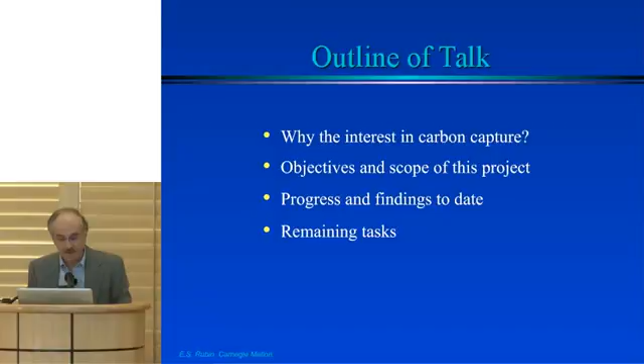So very briefly, it looks like all of us are starting talks with why the interest in carbon capture. I'll assume some of you have come here without too much background in this. I'll talk a little about the objectives and scope of our GCEP project, some progress to date, and some of the work ahead.

So why the interest in carbon capture? In addition to Ed's comments and others, the fundamental motivation is climate change and the fact that we need not small reductions but large reductions in CO2 emissions to achieve those goals. If we were talking about 5 or 10% reductions to solve the climate problem, we would probably not be talking about CCS. 70, 50, 80% is a different story.

Fundamentally, CCS is the only technology available that we know of that can address carbon emissions from the existing use of fossil fuels, which are likely to be around for some time. So my view of it is more of a bridging technology, something that will be necessary if we want to get large carbon reductions fairly quickly while we're working on a long-term sustainable future.

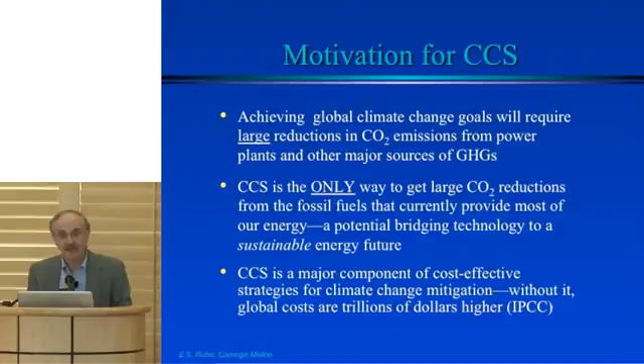CCS also turns out to be a major component in all the modeling studies done globally. When one looks at cost-effective strategies to meet climate change, every modeling group who's looked at this shows that without CCS on the table, the costs of achieving climate goals will be substantially higher. Trillions of dollars are typically the estimates that come out of that.

So while the focus of this talk is on CO2 capture, we shouldn't forget that it's really part of a capture and storage, or sequestration, system that has three major components. First, the ability to capture CO2 from power plants and other industrial sources that produce it. Again, the CO2 might arise from coal combustion, but it might also arise from natural gas combustion or the use of biomass, so-called negative emissions.

In order to sequester or store it in a geologic formation, which looks like the most likely option right now, one has to compress and transport it. The compression is typically needed to turn it into a supercritical fluid, essentially a liquid that can be moved by pipeline to appropriate storage sites.

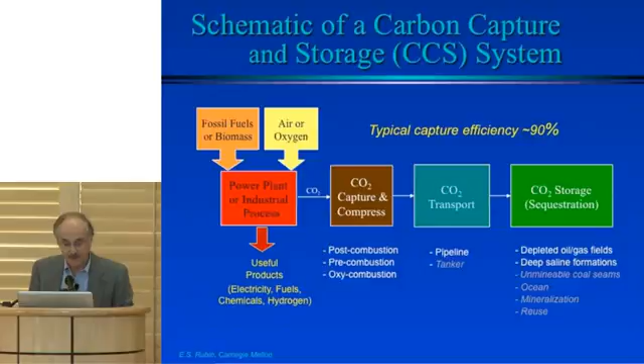We're going to be talking about two major approaches: what we can do today, as Ed set up beautifully, post-combustion and pre-combustion. Here's a little more detailed schematic of what a post-combustion system would look like at a coal-fired power plant today.

This is what most utilities look like without the CO2 capture piece. The yellow box in the middle represents a variety of technologies to address so-called criteria or conventional air pollutants: SOx, NOx, particulates, mercury. If one were to capture CO2 in a post-combustion environment, one would add another piece of technology after that, upstream of the stack.

As Ed indicated, the current technology that would do that job is an amine-based system. We have CO2 at low concentrations and low pressure, so this is a chemical solvent, and its energy requirements are substantial.

The pre-combustion system looks a little more complex. The CO2 capture piece here actually has two components. There's a CO2 capture unit toward the back which today would use a physical solvent, since here we have high pressures and relatively high concentrations of CO2.

So rather than a chemical solvent, one can use a physical solvent to do that job at a much lower energy cost. But for that to work, one first needs to add upstream a water gas shift reactor, a chemical process that converts CO in the gas to CO2 and H2. So the CO2 capture unit is basically working on a CO2-hydrogen mixture, as opposed to post-combustion, which is largely a CO2-nitrogen mixture at much lower pressures.

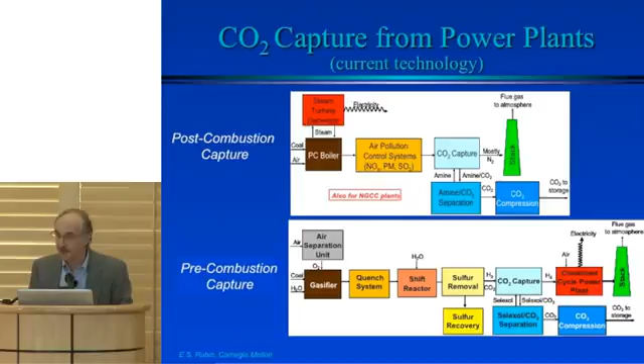Again, the chemical that would be used today favorably is commercially called Selexol. It's a glycol-like substance that has been used widely in industrial applications.

Here's what some of this actually looks like in terms of hardware. These technologies for both post-combustion and pre-combustion have been used at power plants, both gas and coal-fired, the two on the left, at scales roughly an order of magnitude smaller than a commercial plant today. These units are on the order of a couple of tens of megawatts electricity equivalent.

Hydrogen production plants, or this particular one, use a Selexol system to essentially do the same separation, except the hydrogen is used to make chemicals instead of electricity.

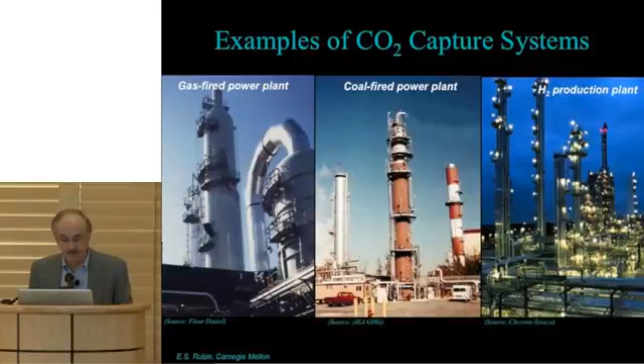Here are photos of two newer developments. The one on top, it would be fair to say, is a big deal. This is the first large-scale demonstration of post-combustion capture at a coal-fired power plant. It's what the community has been waiting at least a decade for.

Canada won the lottery on this one. The Sask Power Boundary Dam facility at 110 megawatts had its official inauguration just two weeks ago, though the plant started up a month ago. The CO2 capture unit is this unit in the foreground.

This is now operating at 90% capture, and for the first month or so, so far so good. The picture on the bottom is a unit still under construction, now scheduled to start next year rather than this year. It's a large gasification plant that the Southern Company is building, capturing CO2 using Selexol as a solvent at a scale of 600 megawatts with about 65% capture.

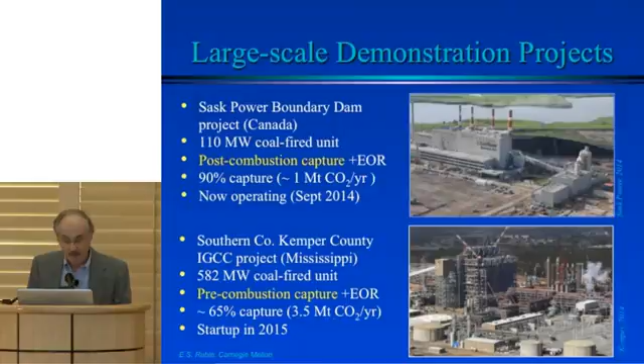So we're starting to see in these two examples, and others planned in Europe, the first large-scale implementations of that. If that's the good news, this is the bad news.

They're expensive technologies. To one significant digit, in a new post-combustion plant, adding an amine system would increase the cost of generating electricity at that plant by roughly 70%. The incremental costs are lower for gasification combined cycle and natural gas plants, but still quite significant. And in terms of absolute cost of electricity, we're at different baselines.

We're talking about CO2 capture in this meeting because most of that cost is associated with the capture part of the system. Transport and storage costs can vary depending on site specifics, but they're roughly on the order of 20%. So if you want to make a big dent in CCS costs, you've got to go after the capture process.

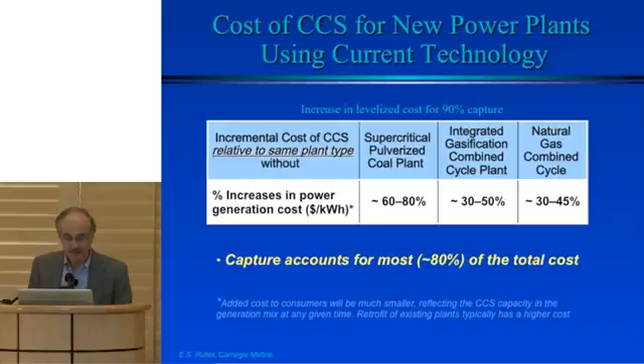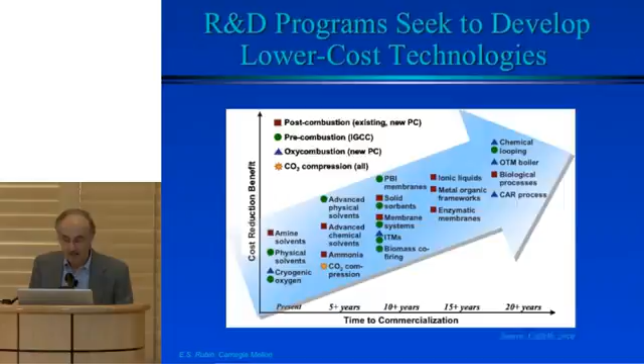I was happy and delighted to see GCEP join that process a couple of years ago. A request for proposals sought advanced carbon capture processes, and consistent with the GCEP philosophy, looking for—these were the words—step out, game-changing improvements that could have big impacts in the next several decades. As a result of that solicitation, three projects were selected: Joan's project at Notre Dame involving ionic liquids, Randy's project at Northwestern involving metal organic frameworks, and Jen Wilcox's project here at Stanford involving some novel activated carbon sorbents.

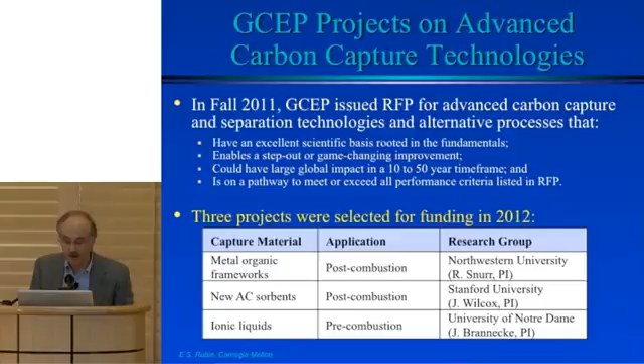So what am I doing up here? A year later, there was another RFP asking for development of a systems analysis framework to evaluate novel processes—these three in particular, but others in general—in the context of some rather rigorous criteria that GCEP had put in the original proposal for what they'd like to see in these advanced processes.

So we were selected, along with Chris Edwards' group here at Stanford, to work on a systems analysis framework that could be used to get some quantitative metrics for just how these advanced systems would fare relative to baseline systems in the context of full power systems.

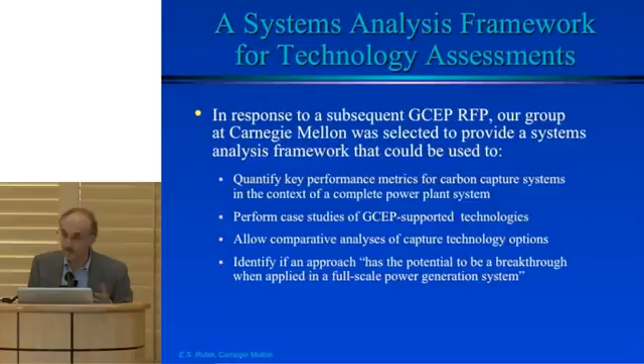The approach we had proposed and have been following is to build on some prior work we've been doing with a lot of support from the Department of Energy. With that support, we've built a modeling framework called IECM—if you Google it, Integrated Environmental Control Model.

Essentially an easy-to-use model of a single power plant—could be coal-fired, gas-fired, biomass. It basically includes all of the environmental control systems, not only for air, but also for water, because water use is another issue here, and solid waste. So it's basically a full-blown mass and energy balance with engineering economic models and the ability to handle uncertainty.

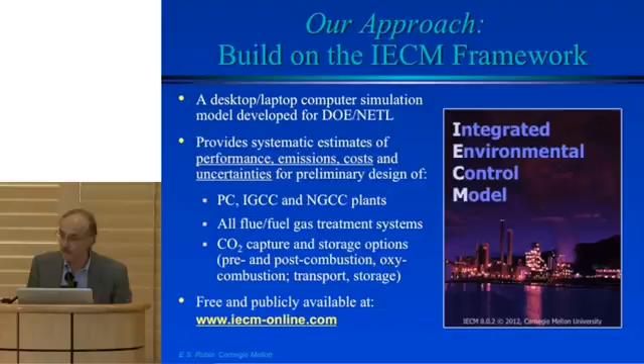We propose to build on this framework as a tool that we, and then others, could use to ask and quickly answer a whole variety of what-if questions—what if I could create a material that had these characteristics, and so on.

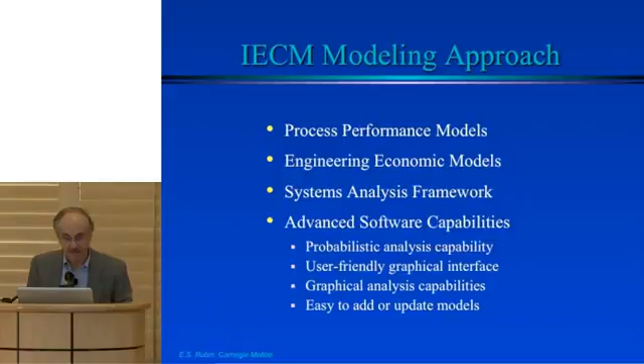So the overall approach is basically to couple engineering process performance models with models of cost, engineering economic models, in a systems framework that has a probabilistic capability, so one can look at uncertainties in a fairly rigorous way to identify both risks and opportunities, and hopefully in a package that, again, is easy to use and portable so others can play with that.

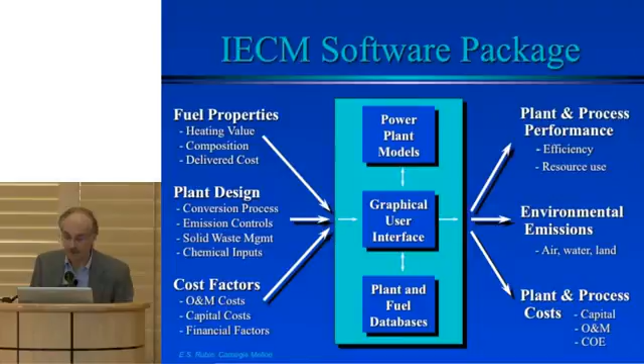So the software package, if you were to download it today, has a graphical user interface behind which there's a lot of stuff. You bring to the model information on the design of the power plant you're interested in, fuel properties, some cost factors, and the model delivers information on process performance, emissions, and costs.

So when this project started, we already had a whole suite of technologies—a number of CO2 capture, baseline CO2 capture systems we had worked on, some other things we're doing for DOE, and a whole suite of power plant and environmental control technologies.

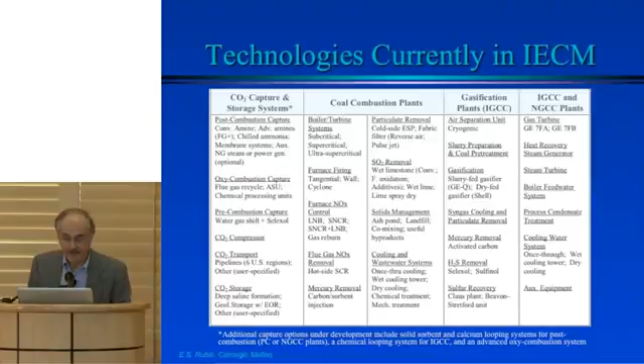What we've been doing in this project is to work specifically with the three groups that GCEP has been funding to develop new process performance and cost models that could be implemented in this framework and used to assess some of the specific criteria that GCEP put in their original proposal.

These guys have, I think, the biggest challenge ahead of them. GCEP enumerated 8 criteria. I've reorganized them into 4 that deal with performance metrics and 4 with cost metrics. I've highlighted 3: the ability to capture and separate more than or equal to 90% of the CO2, to substantially reduce the energy penalties relative to what they are now, but also to keep the cost low. So it's a perfect GCEP challenge, along with a number of other things.

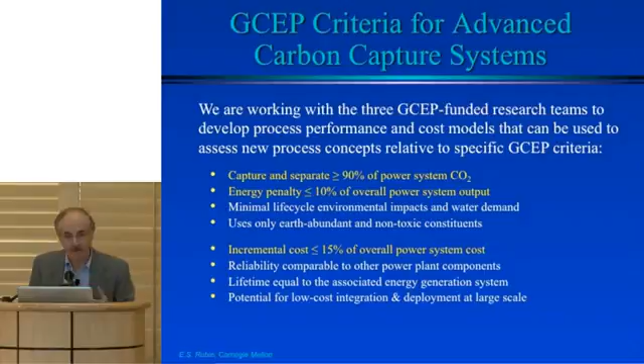So our job is to try to figure out how things are going in these directions, and probably more importantly, to try to use a larger modeling framework to suggest ways that one can move more effectively toward meeting these goals. So let me tell you first about some of the work we're doing.

The 3 projects all have about a year left, as does our project. So we're about halfway through the project. This is really intended to be a kind of an informal progress report to GCEP and others.

Let me tell you first about what we've been doing in the area of post-combustion capture. I should back up and say first that all 3 groups that I mentioned are still working actively on their materials. They have not given us the formula, the magic recipes yet for the materials they think will do the best job.

Somehow, maybe it'll show up later, a slide seems to have been dropped. So what we've been doing is working with what I've called surrogate materials, materials that are similar in nature to the materials that the groups are doing, but they're not the last word.

One of those, in Jen Wilcox's project here at Stanford, is looking at—and we heard a little bit about this morning as well—some novel activated carbon sorbents. These are basically solid sorbents that might do the job.

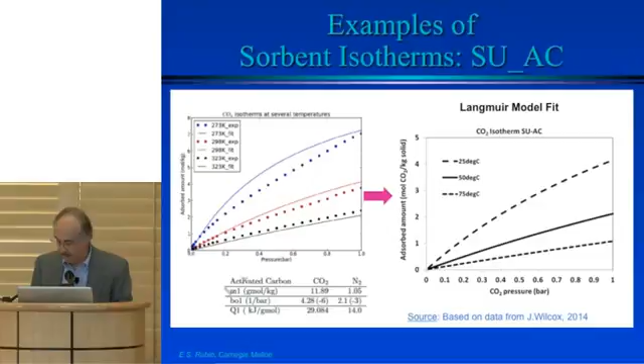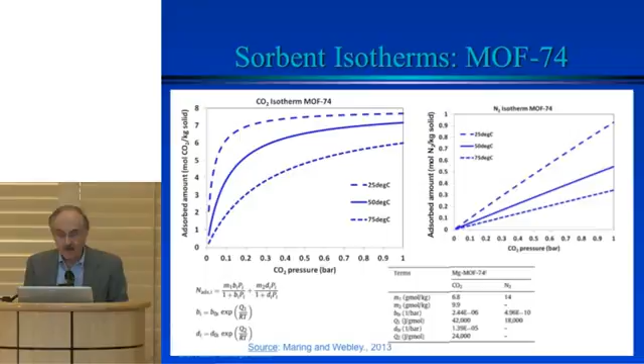On the MOF side, with advice from the folks at Northwestern, we've looked at a number of metal organic frameworks that they believe would be most useful to start playing with. The data I'll be showing you—we've looked at several MOFs. We've also looked at some other solid sorbents, not of either of those types.

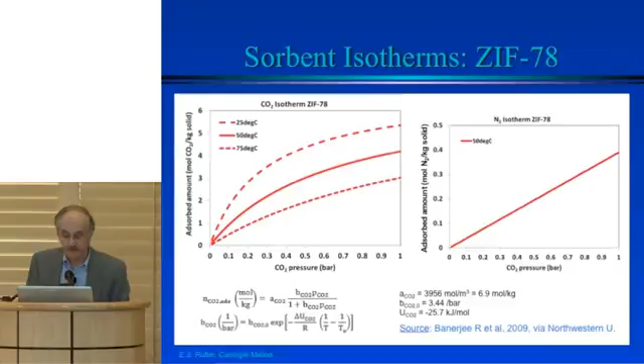I'll show you some preliminary results in a minute based on, this is a zeolite, we'll just call it ZIF-78, isotherms of the sort that Ed just showed. So here is basically CO2 uptake as a function of temperature and pressure. We'll look at a case study at 50 degrees Celsius, which is a typical flue gas temperature coming in, using isotherms both for CO2 and nitrogen, where you'll notice the scale is quite different.

We wanted to start as simple as we could, so the first model we've put together is a three-step process which involves adsorption and regeneration. It's a pressure swing system where flue gas containing, in this case idealized as CO2 and nitrogen, is fed into an adsorber, and then when breakthrough occurs, the system's reversed and there's a vacuum that pulls out the CO2 to give a CO2-rich product.

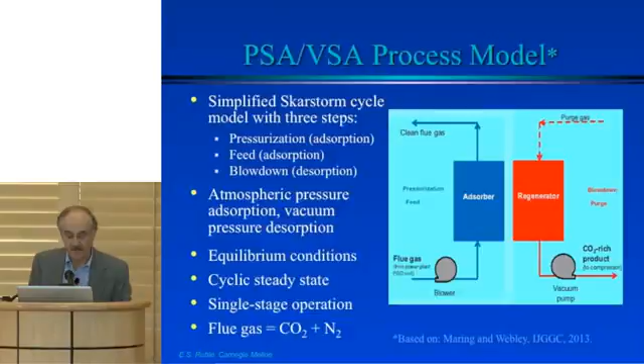One of the things you can see in this system—well, I think I have another slide here. I'm going to skip over the details; it's in there. Here's a better representation. Let's look first at the one on the right—on the left, rather.

These two lines: the blue line is showing CO2 recovery, which is basically the CO2 capture efficiency, and the red line showing the purity of the CO2 that's captured. The GCEP target is 90% capture, and for this sorbent at this temperature, the only way to do that is at very low pressures, probably unrealistically low, but those are the numbers that would come out for a single stage vacuum separation. So at 90% recovery, the purity levels don't exceed about 70%.

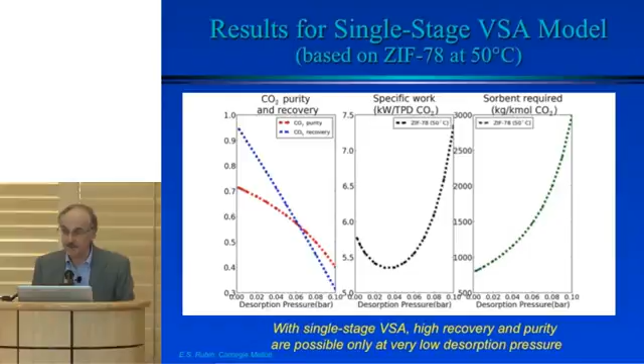These two slides show specific work—this is energy per unit mass of CO2 absorbed and the sorbent required to do that. Again, we need to operate at low pressures, which is what comes out of the information here.

So we've run a preliminary case study using our IECM framework where we assume 90% capture in a single stage VSA system. We pressurize the adsorber to a little over atmospheric pressure, 1.2, and desorb at this very low pressure, but then compress the CO2 to 135 bar, which is basically pipeline pressures.

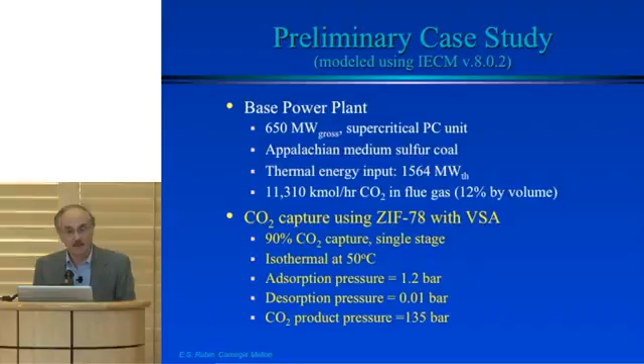It takes a significant hit comparable to what it would take with a conventional amine system, but also with lower purity, and that would probably not be pure enough to put into a pipeline. So the take-home message here is we need to go back and build a more complex model, probably a two-stage process, and play with some additional parameters to achieve higher efficiencies and higher product purity with this system.

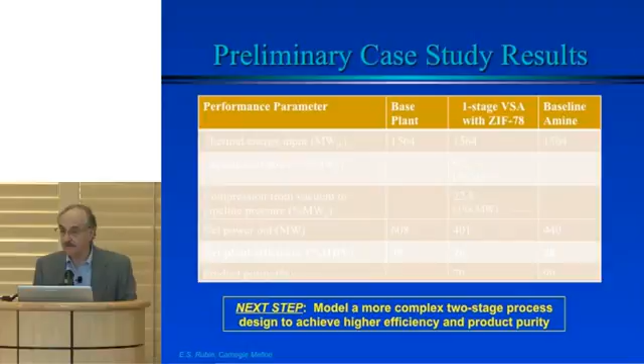This was the best of the several sorbents that we looked at, and so other materials would have similar challenges, I think, is the preliminary finding that we come out of here.

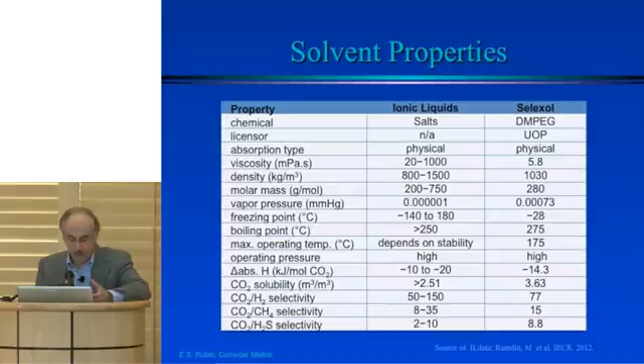We also modeled a pre-combustion system using ionic liquids. We used a particular liquid that was recommended to us by the group at Notre Dame. Here, basically, we're substituting ionic liquid for a conventional Selexol solvent. The technology, the process for doing that is the same using either solvent. So there's an absorber. This is syngas from the water-gas shift reactor, so it's essentially modeled as a CO2-hydrogen mixture. In this case, in both cases, we've taken impurities out of the system.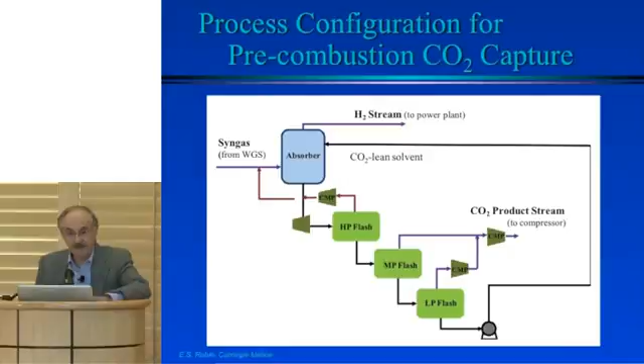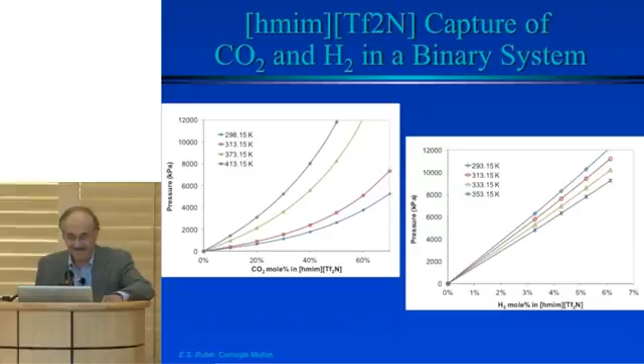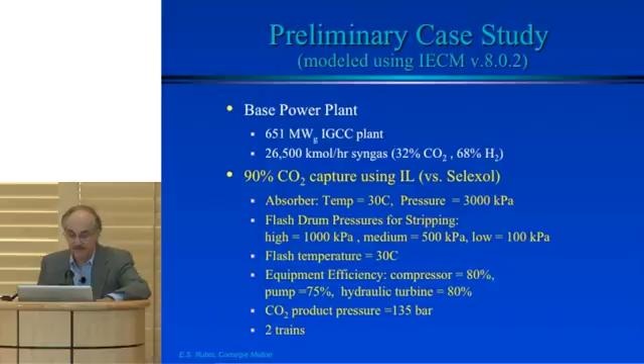The absorption is followed by a series of depressurization steps in flash drums and recompression to basically desorb the CO2. Again, we use data for that particular ionic liquid, which Ed can probably pronounce and I can't, and used it in a preliminary case study where, again, we're looking for 90% CO2 capture and taking an entire system compressed to 135 bar with an idealized gas mixture of CO2 and hydrogen.

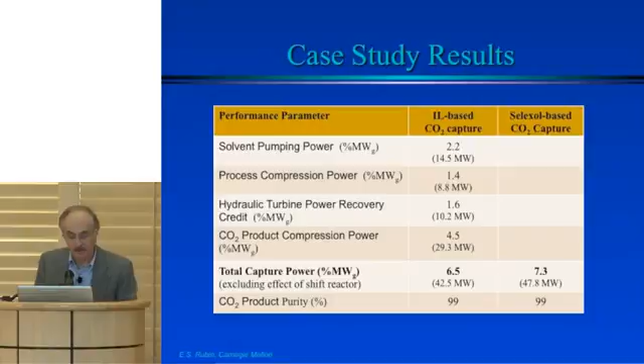There are details of the process model that I'll put in the presentation, but here's the bottom line in terms of the simulation of the overall power plant. This is the power just for the unit I just showed you, and in this case, the ionic liquid actually turns out to be about 10% better in terms of energy requirements than Selexol. Not a huge breakthrough, but a step in the right direction, and we can look forward to other properties.

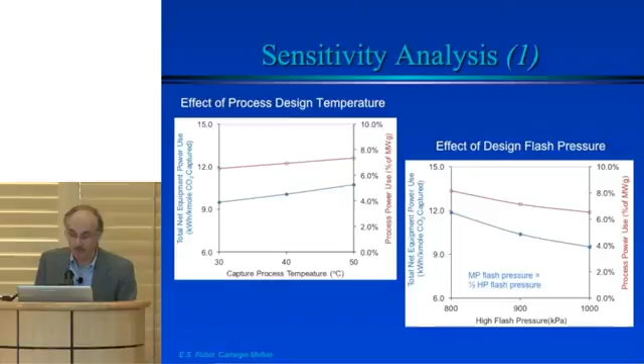Haibo Zhao, who did this work, also did some sensitivity analyses. We're starting to play around with this to look at effects of various design parameters, and what we really need to do with CO2 removal efficiency, if one backed off the 90% target, moved down to say 85%, actually some things start looking better. So there's a lot of playing around that remains to be done.

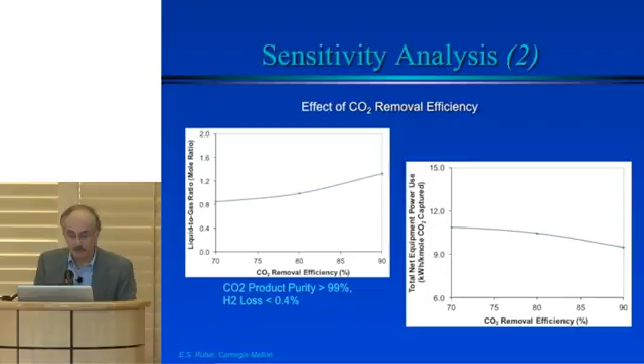I think in terms of preliminary messages that come out of this very early work, we're just underscoring what Ed and others have said, that work on novel materials really has to focus on high selectivity to ensure high capture efficiency as well as high purity.

These have all been idealized simple systems, so we haven't mucked it up by putting any water vapor into either of these. None of these materials like water vapor, and so either you have to design one that is impervious to it, or make the system more complex by taking a dehydration step, which is really not what you want to do.

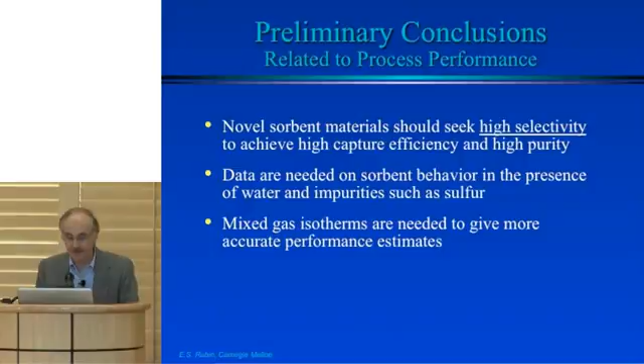So in order to improve the realism of this, we'll need additional data on sorbent behavior in the presence of water and other impurities, and isotherms, not for single component gases, but for mixed gases, in order to get more realistic performance estimates. So none of those imperfections were in those results I showed you earlier.

Let me just say a brief word about process cost models. I'm not going to show you any cost results today. We're working on that, still a work in progress, but just in terms of what our approach is and some preliminary conclusions from some other work we finished recently on some other processes.

What we try to do in our cost models is first estimate, on the capital cost side, what are often called direct equipment costs - what would it cost to buy and install the equipment that one needs to do the capture. What's often forgotten, and often handled with not as much care as is perhaps needed, are a lot of the indirect costs.

So in a traditional cost estimate, after you do an equipment costing, there are a series of other measures, things particularly called contingency costs, that are all typically estimated as a percentage of your direct equipment costs. There are some guidelines for how that can be done.

In some recent work, I've stuck my head out and pointed out that major organizations who put out these guidelines, like DOE, EPRI, and others, in many of their own studies don't follow their own guidelines and tend to give numbers that are probably more optimistic than they should be for this stage of development. So we want to be careful going forward.

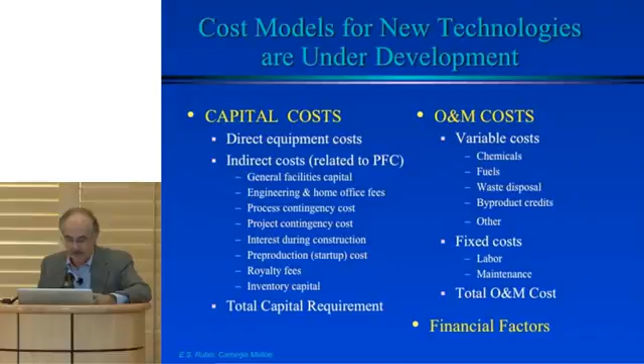The reason is that there's a lot of history that suggests we tend to be optimistic technologically at the earliest stages of technology development, but as technologies mature toward FOAK, called first of a kind, a real commercial reality sets in. While ideally we all want to get to that low-cost nth of a kind plant, you have to start somewhere else, and you can't get to the nth of a kind plant without building N plants. If you never get past the first one, you'll never get to the nth of a kind plant.

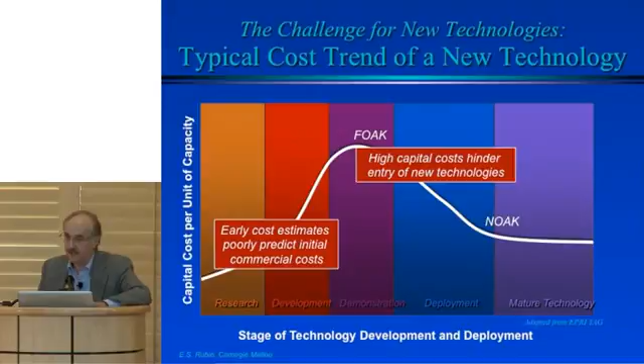What we have found, and I suspect we'll find in this case, is that high capital cost is another major barrier and hindrance to the entry of new technologies. Historically, there's a lot of data to show that we've done a poor job of predicting commercial costs at early stages of development.

So we're going to try to do a more careful and more realistic job on that. But the message that comes from the work we've done so far is that while as engineers we're always after the holy grail of improved efficiency, there are trade-offs. And so there are challenges not only to the technical community in finding and tailoring more appropriate materials, but also to the engineering community at large in finding ways of minimizing the capital cost of these systems.

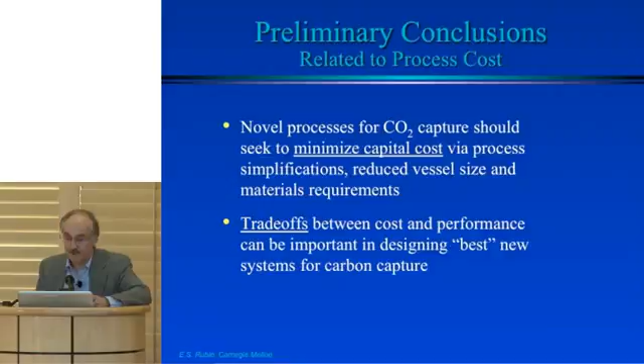And challenges in terms of how we can make things simpler, how we can reduce the size of vessels, how we can use materials that are cheap and not expensive. Those two sets of challenges, I think, are the ones I want to emphasize here, and the fact that there are inevitably going to be trade-offs between cost and performance in terms of getting to that next best system.

So a lot of the work ahead, we have a number of tasks that we had initially proposed that involve refining models, characterizing uncertainties. I haven't talked about life cycle analysis. We want to ask where a lot of these new materials come from and whether there are secondary impacts that need to be of concern.

What we'd like to try to do is reverse engineer our models and come back with advice to the process developers for what kinds of parameters they ought to be seeking, and that will be a major focus of the work that's ahead.

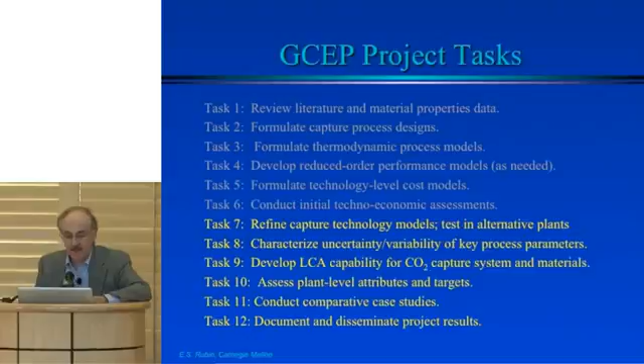So with that, I will thank you, with apologies for running over, and take a question or two if there is one.

So we have a couple of minutes for questions. Sally? Oh, there's one. Okay.

Thanks. So you said high selectivity is important, but what's high? Do you have a sense of what's high? What would be a target that somebody should be shooting for?

We didn't come with numbers. If we go back to some of the data that we showed, it would depend on the particular material we're talking about. But the basic message is we need to do a better job of getting higher purities on these separations. So when we see 70% as a maximum for that particular substance, those are basically substances reported in the literature, it's not what people are currently working on. What you really want is 90 and 90. So what that backs into in terms of the particular parameter, we'll figure that out. But that's what we're looking for.

Over to Paul. The effect of water vapor, I think, is going to be an especially problematic one for a lot of these materials. And yes.

So on your task list, one thing I didn't see, but you did kind of mention it during the talk, is sensitivity analysis. Yeah, and I encourage you to keep on the sensitivity analysis. That might help with, maybe you don't build the best plant to begin with, but it helps you later on when you get to the nth, you can start to do the 90%, something like that.